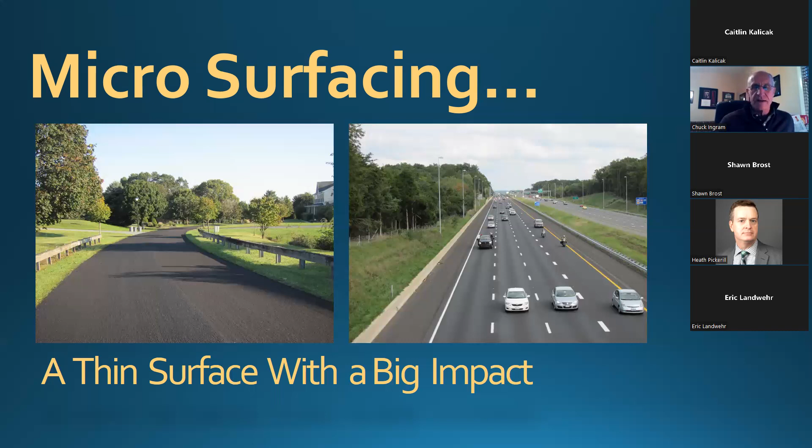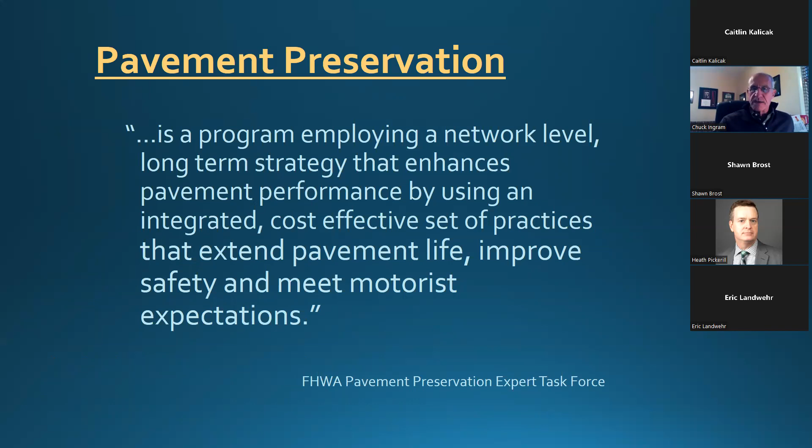So to start off briefly, we can give a broad brush look at what pavement preservation is as defined by the Pavement Preservation Expert Task Force, which just recently changed its name, and I'm a member of that group, so I should know the name, but it's definitely affiliated with FHWA. In years past, they identified pavement preservation as a program employing a network level long-term strategy that enhances pavement performance by using an integrated, cost-effective set of practices that extend the pavement life, improve safety, and meet motorist expectations. So again, it's put on a road that's in pretty good shape to enhance the investment you've already got.

Another FHWA definition would say that preservation involves a paradigm shift away from the thinking that unfortunately a whole lot of people still subscribe to, a worst first theory. They'll say, well, I've got roads that absolutely need to get paved, I don't have enough money to do pavement preservation. Well, nothing could be further from the truth. So what we're trying to do today is gain some insight on how we get away from this worst first way of thinking and move more towards optimum timing, because the timing will have everything to do with the success of these thin treatments.

One of my favorite definitions of pavement preservation: when I first got started here in Virginia back in the mid 70s, the highway maintenance engineer in VDOT, before pavement preservation or preventive maintenance were buzzwords, said this kind of stuff is something you put on a road a year before you need it. And really and truly, all these other definitions had a lot of words to them, but when it comes down to it, if you time this right and put the right treatment on the right road, a year ahead of time is probably a good timeline to stick to.

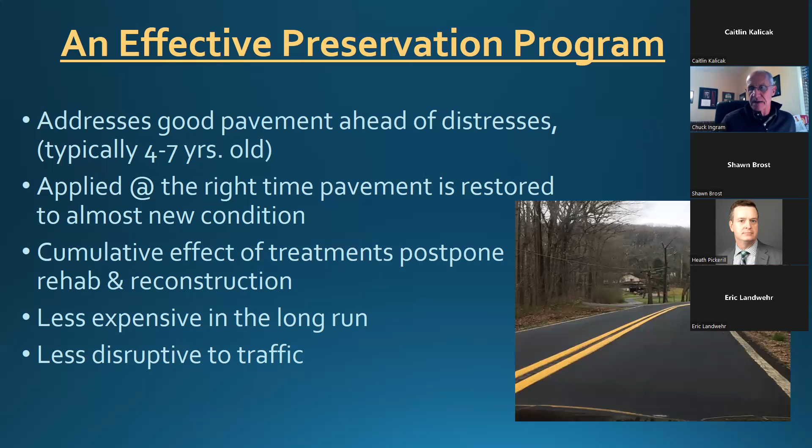This is the second application of microsurfacing to a road that's had nothing else done to it over the course of 17 years. And so he uses this picture to argue with his bean counters that pavement preservation is really paying off for the county.

Pavement preservation is really an umbrella that covers different types of maintenance. What we're going to spend most of the time on is the preventive maintenance aspect of pavement preservation. We're trying to capture these pavements while they're still in decent shape, before the surface distresses have a chance to take over. But we're all involved with budgets and decisions and everything else, so there are going to be times that we're using these thin treatments as corrective tools.

Sometimes the surface distresses are caught up. Maybe you're in year 7 or 8. You've got some surface distresses. And so what you're really doing is shortening the potential performance curve of a thin treatment by using it later in the pavement's life, because you're hoping to correct the surface distresses that may already be in place, and consequently they're just going to shadow through some of these thin treatments a little quicker than they would if you had applied the stuff to a pavement in a little bit better condition.

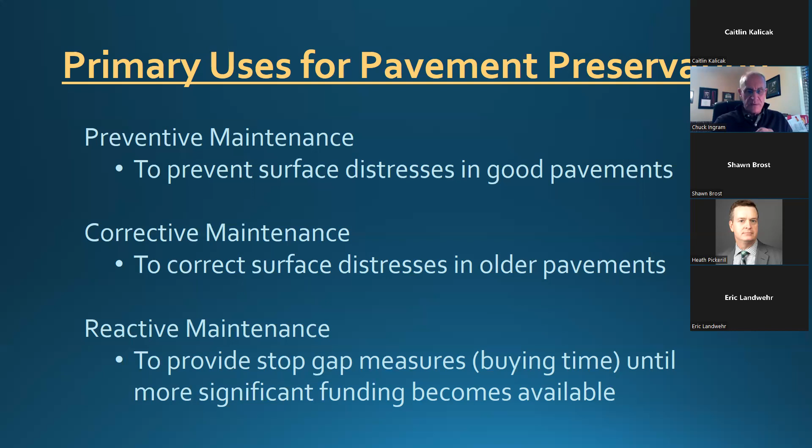And we also get caught in a situation where I just got this much money, I got this road, we got to do something to it. And I understand that putting a blanket on this road right now is not what it really needs, but I need to buy a little bit of time. And I'm really cautious about agencies that are stuck having to react this way to their budgets. But as long as everybody's on page with understanding what the intent is of putting a thin surface treatment like a microsurfacing down on top of a pavement that's several years old with multiple distresses in it, as long as we understand that we're just trying to get over the hump until we can afford to do the proper, perhaps more expensive fixes, we'll be okay.

What we refer to a lot of times the microsurfacing as is one of the top of the curve treatments. Now look at the red line. We've all seen pavement condition curves over time that tell different stories, but obviously your pavement's going to start off in year 1 in excellent condition. And arguably, this chart goes out to where the pavement condition at year 13 or 14 has completely reached the end of its life. Now, obviously, I've gotten some pushback from friends in the hot mix asphalt industry over that slide, arguing that their pavements are going to last longer than that. But then I've also had discussions with various DOT people who are seeing pavement life not reaching this level. So we'll just pick this happy medium.

In the first 75% of this particular pavement's life, or sometime in about year 10, you're going to lose about 40% of the quality that was built into that pavement. As you can see, that curve is just sort of gradually depleting right now. But in the first 10 years, you've lost 40% of your life, but all you do is go forward another 2 or 3 years and you've lost yet another 40%. So once that curve starts dropping off, we really start losing the value of the pavement that we have. Something's got to get done to it closer up to the top of the curve that's going to extend that serviceable life.

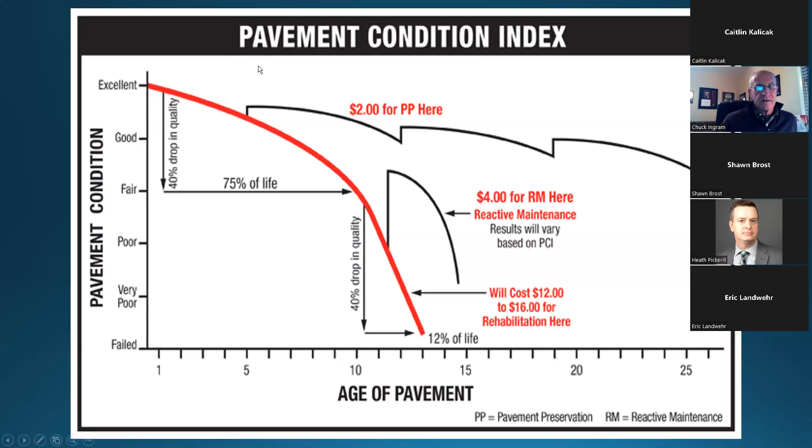Putting it in terms of the thin treatments that we're talking about here, up on the top of the curve, like I said, you've got your fog seals and slurry seals and microsurfacing. Pavements have got to be in pretty good shape for those to be effective. And we're still above the 75% of the life curve here. Arguably, some forms of chip seal applications can be still effective a little bit later down that curve.

But once you start getting much below the fair category, some of these thin preservation treatments really are not going to be the answer for getting your system back up into the condition that you want to keep it in.

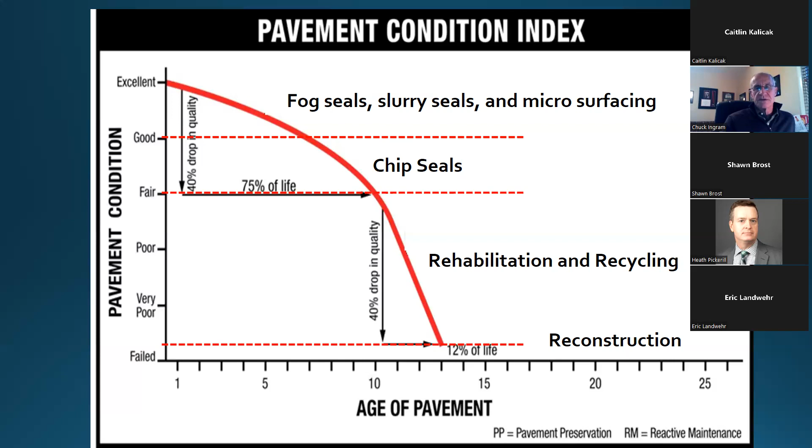This is one of the better pictures and stories that clearly tell just what I've been talking about here. Got this slide from a friend of mine up in Connecticut. There is a road up between Fairfield and, I'm not sure what the neighboring town is. The two towns co-own this road. Fairfield owns to the right of the double yellow line. The other town owns to the left.

In 2004, they did a cost-sharing job where they had someone come in and mill and pave the pavement. And over the course of the years, the town on the left just let Mother Nature take its course, whereas the agency on the right-hand side had already adopted a fairly aggressive pavement preservation program citywide. And in year 6, after the application of the new asphalt, they began a crack sealing and microsurfacing program. So that was in 2010.

And fast forward here, you're 6 years later, and you can graphically see the value of what a periodic combination of pavement preservation techniques can have over the old worst first philosophy that the town on the left has. So we have a pretty graphic example of what the value of pavement preservation can be on similar pavements.

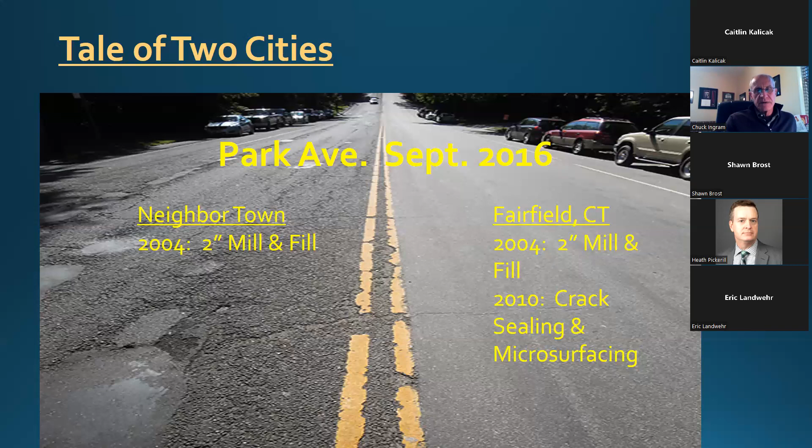Okay, for those not really familiar with what microsurfacing is, and we'll see pictures in just a second, it's a mixture of a finely, continuously graded aggregate, a little bit of mineral filler, some polymer modified asphalt emulsion and water, all properly proportioned and mixed as a thin surface treatment. We'll get into the recipe and see the application equipment and how it works. But basically, it's just a thin, say, 1/4 of an inch or 3/16 of an inch thick application to a road in pretty good shape.

When it's applied, the cured microsurfacing is going to have a homogeneous appearance and fill cracks. Be very careful with that terminology about filling cracks with microsurfacing. That's why I capitalized it there. While it is a liquid material with some fine aggregate in it, it will seep into some of the wider cracks. But the microsurfacing itself is not designed to seal cracks on a long-term basis. It's not your end-all be-all treatment for cracking.

I always say that if you've got a cracking problem, treat it with the cracking materials that you've already utilized, and we'll see how well they work with the microsurfacing in combination in just a little bit. But if you use the material properly, it's going to adhere firmly to the surface and provide a weatherproof high friction seal. So one of the other values that we build into the microsurfacing application is a skid resistant surface, and it's come in very handy on days like today.

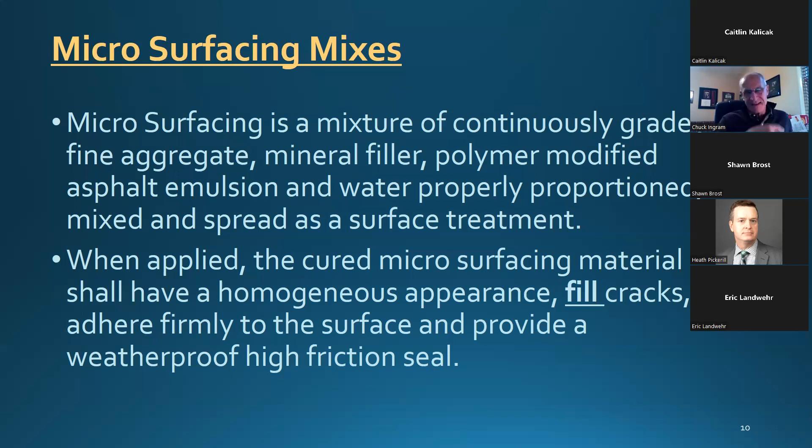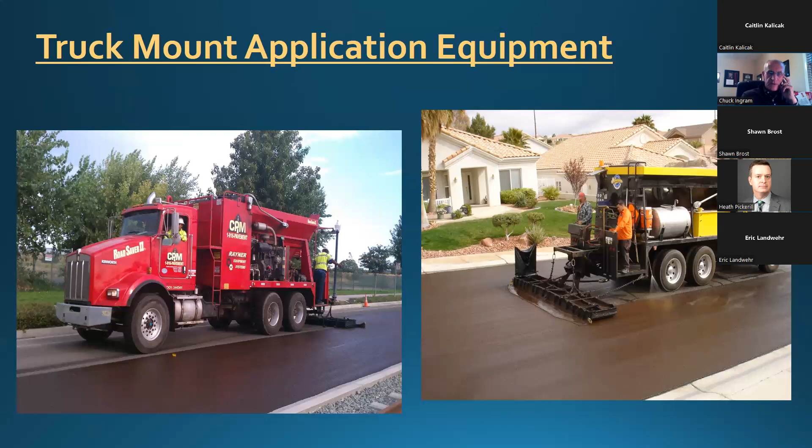Now these truck mount pavers are typically used on some smaller work. You can see here we're working in residential areas, cul-de-sacs, parking lots, places where there's a lot of low volume traffic. These truck mount units are portable in comparison to some of the other equipment that we're going to see in just a minute, and they're very well suited for these smaller jobs. And these truck mount pavers have got some advantages as opposed to some of the bigger equipment we'll see.

It's flexible, it's more mobile. You're operating with several less people on your crew. You know, a truck mounted crew like that, including your traffic control aspect of it, is maybe a crew of 12 to 15 people.

The machine is mounted on a truck chassis. It's quick travel speeds between jobs, and it's very maneuverable. You can sort of see the smaller axle spacings allow you to get into cul-de-sacs and smaller areas.

You know, the disadvantage of these truck mount units, as we'll see with the other equipment in a minute, about every 1,500 feet, one of these trucks is going to run out of materials, and they're going to have to stop, and you're going to have to build a construction joint about every 12 to 1,500 feet. And it's an expensive piece of equipment in that about 3/4 of the time is spent on the road back and forth to the staging area, getting new materials put on it, and very little time actually on the job.

The operator stands on the back, and we'll see all this in a sec. The operator is working the recipe from the back of the truck and does not have control of the forward speed of the paver. And then sometimes that maneuverability can be a bit of a disadvantage in that you are limited to the smaller locations perhaps where it does its best work.

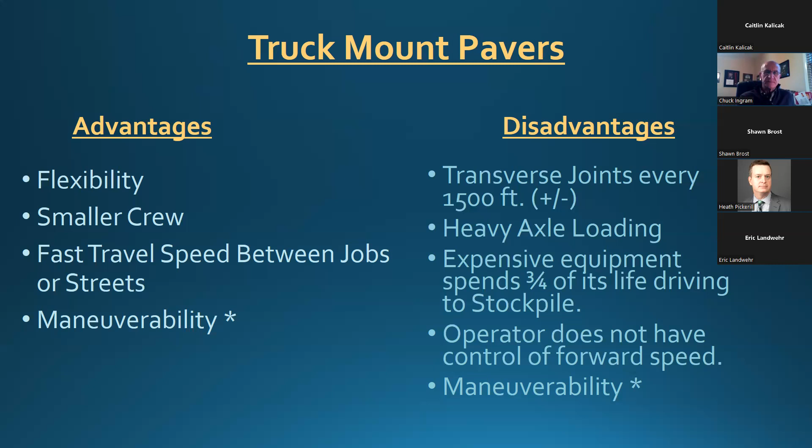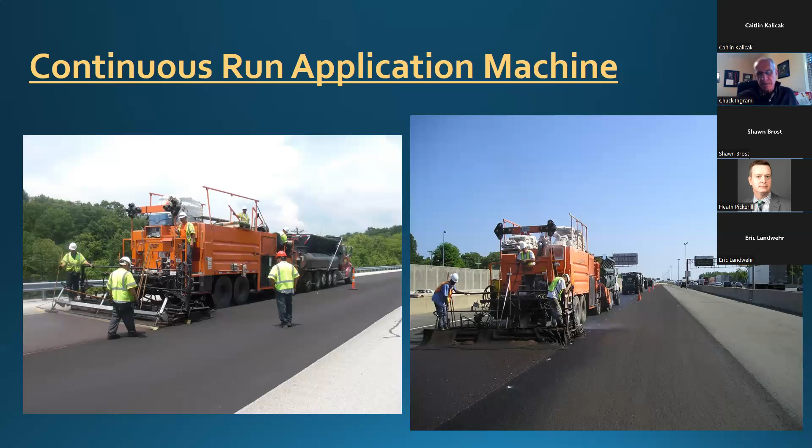It's going to take 15-45 seconds or so for the materials to mix inside the paver before they're dumped into a spreader box that's in contact with the road, and we're paving from right to left here. Right out of the back of that machine, that material, as you saw in the first couple of pictures, is a little bit brown in color because we do have some water that's added to this mix.

As time goes by, in about the first 2 minutes of the time that the material's on the pavement, it's going to start breaking or starting to cure. And when the water starts leaving that mix is when the mixture is going to start turning a darker color. And within about an hour's time, now you've got a brand new installation of a texturized black pavement that should be ready for slow rolling traffic. Now, the microsurfacing that we're talking specifically about is designed to hold that slow rolling traffic in an hour's time.

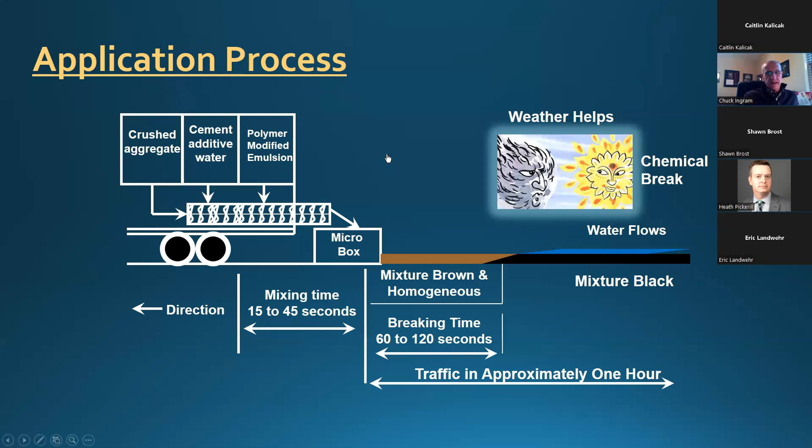And if I can get my cursor straight, we'll turn this video on, and I got a couple of other comments while we're going. Oops. There we go.

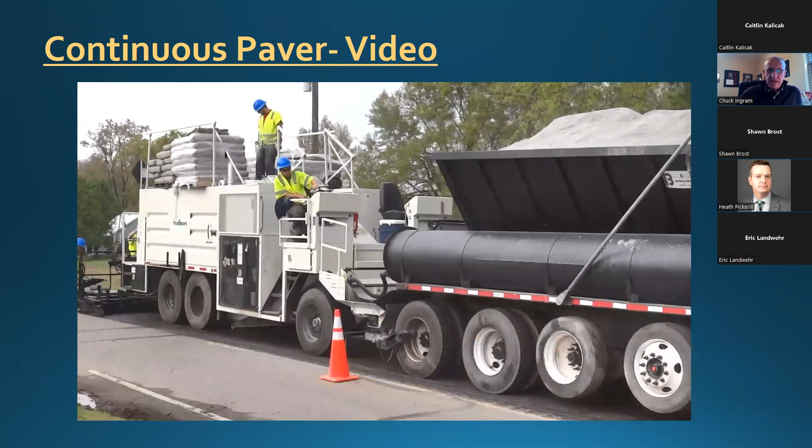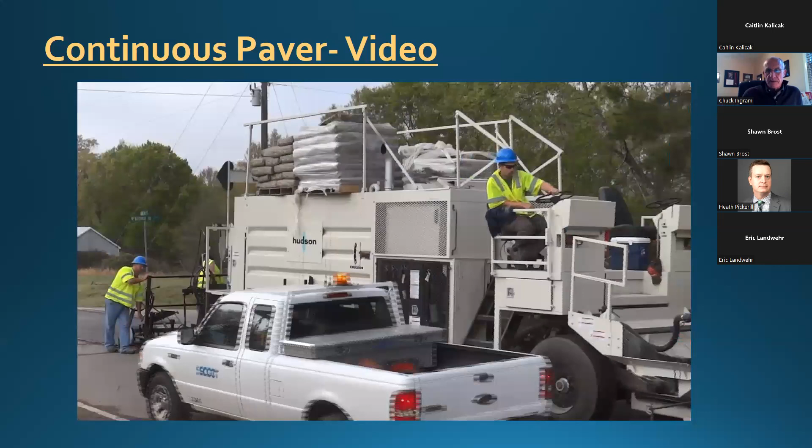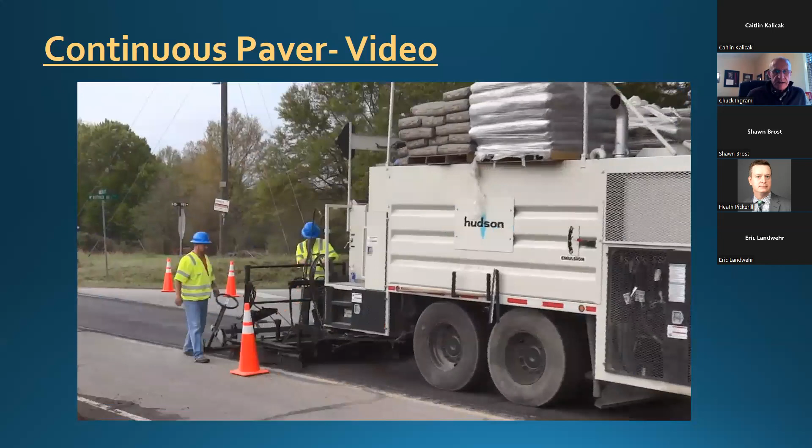You see all these materials are being transferred from the front truck to the back unit there, the paver. The fella sitting down there is making sure he's driving in a straight line. The fellow up top is monitoring the feed of the aggregate as it comes up into a hopper bin. He's checking his gauge settings and the connections with his liquids there. You can see a little picture on top there. We got the stone flying into the hopper. And it's all being moved to a mixing chamber on the back end.

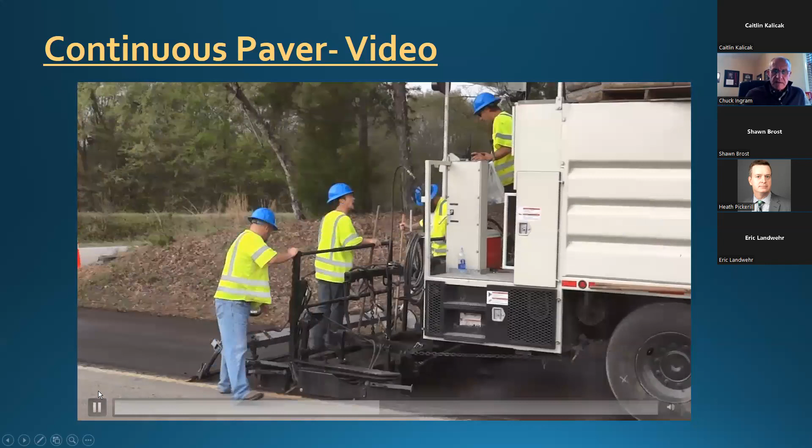I'm going to try to halt this in just a second, where you got an operator back there that is monitoring what's going. Shoot. I apologize.

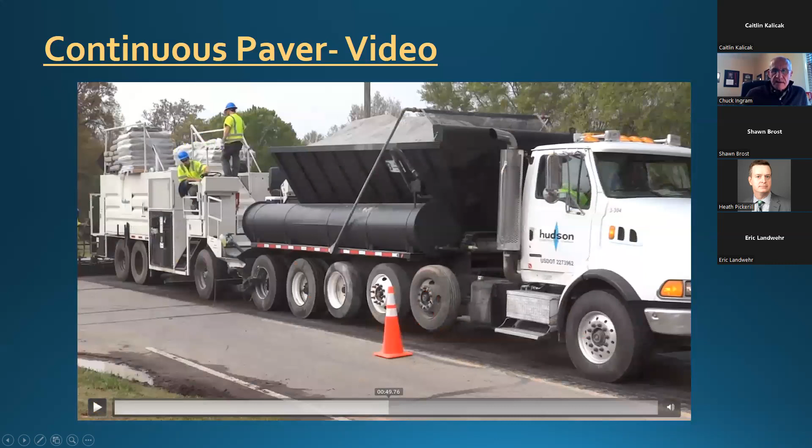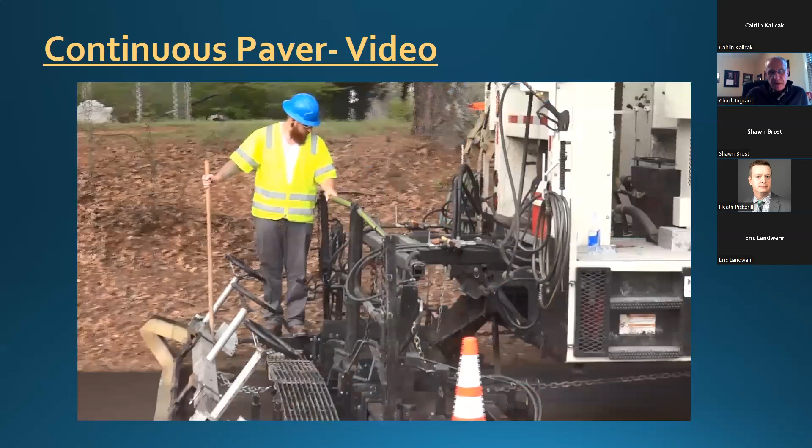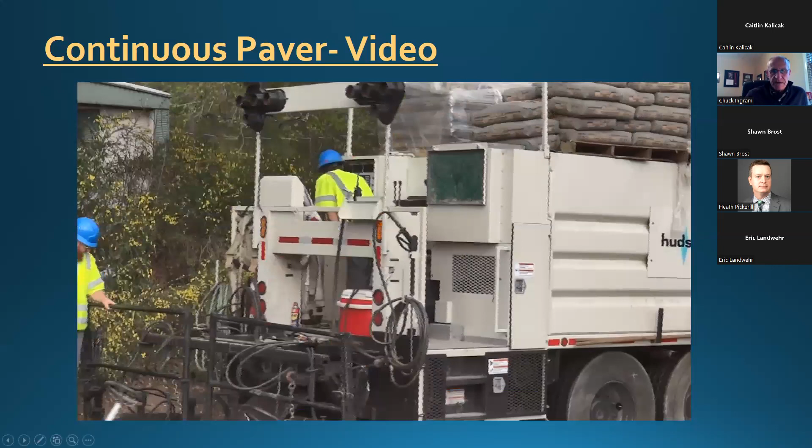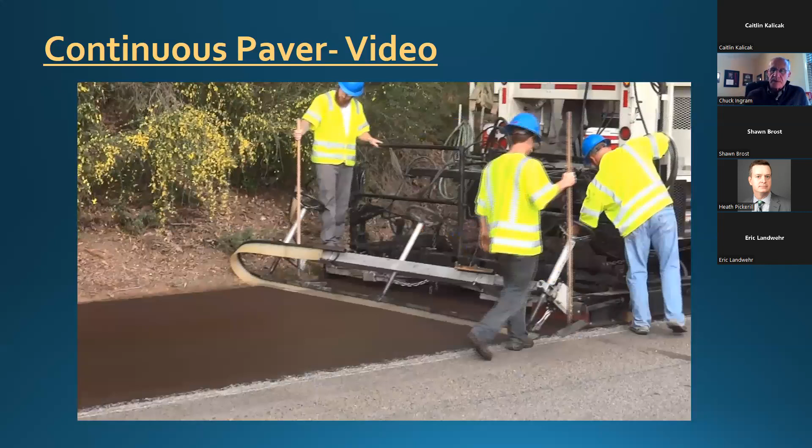Okay, the material's been coming through the machine. All the materials are metered and factored in. They're spit into that spreader box on the back. The operator is checking right now. I'll show you what he's looking at. The computer screen on the back there is monitoring all the throughput, all the materials. You can adjust slightly the crown or the thickness of the application on the back, which is what that one operator is doing there. But you see it's just a thin treatment applied to a road.

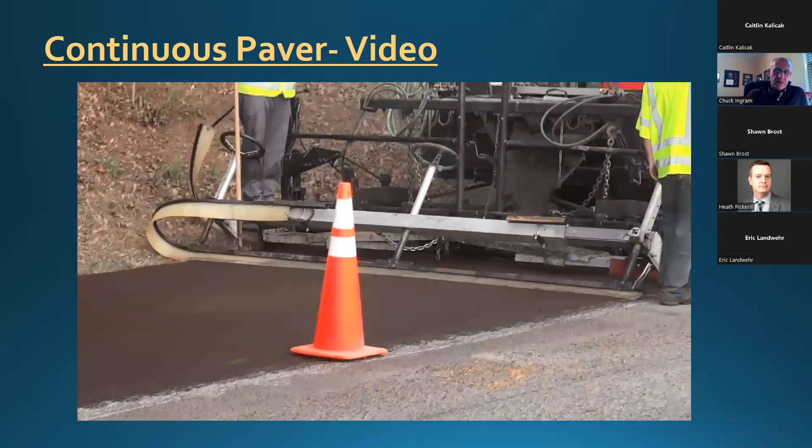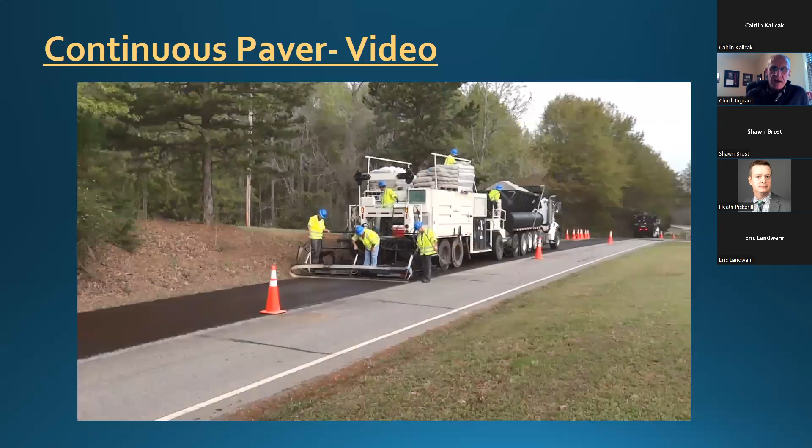It's in pretty good shape with the materials that are metered and calibrated on that machine ahead of time to make sure you're getting the proportion of everything. But a steadily moving operation down through there, a little bit better than a walk pace. Just material as you go. Now you see he's got another nurse truck to hook up to the paver when this load runs out, and it's typically about every, again, 1,500 feet or so.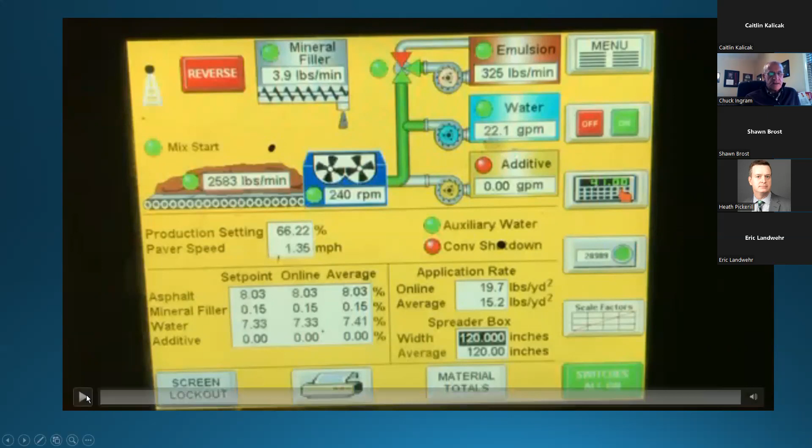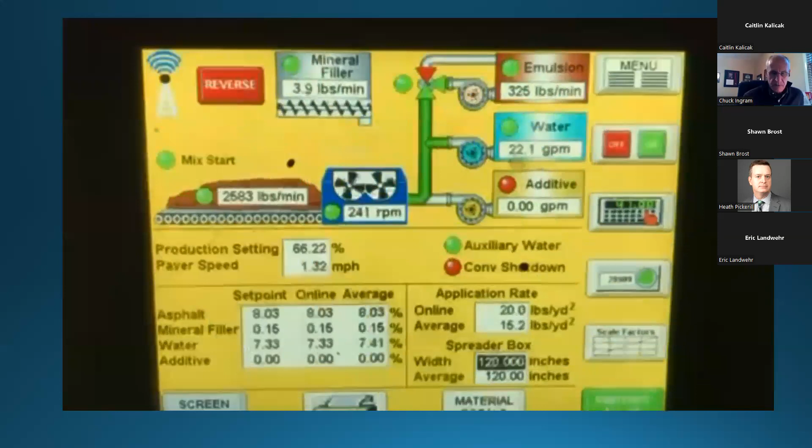The machine is preset. If you go down about 3/4 of the way down on the bottom left there, the set point, the online, and the average is where you have told the machine what your asphalt content should be, what your percentage of mineral filler should be, how much water per weight of aggregate that you're using. And all that is being monitored constantly. And this is what the operators keep an eye on, just to be sure that everything is operating as proper. You can see here also that the application rate is programmed in.

Your specifications are going to dictate just how thick this material should be placed. It's going to be an application rate that's going to have a range; say for this material here, they're working somewhere probably between 15 and 18 or 19 pounds per square yard. And that will be calculated as you're going through. This machine also will have a printer for those of you interested in keeping track on a regular basis through the course of a day of what my project is doing, how much materials am I using. The operator can give you a printout from the back of that machine at any point during the course of a day to keep you apprised on just what's going on.

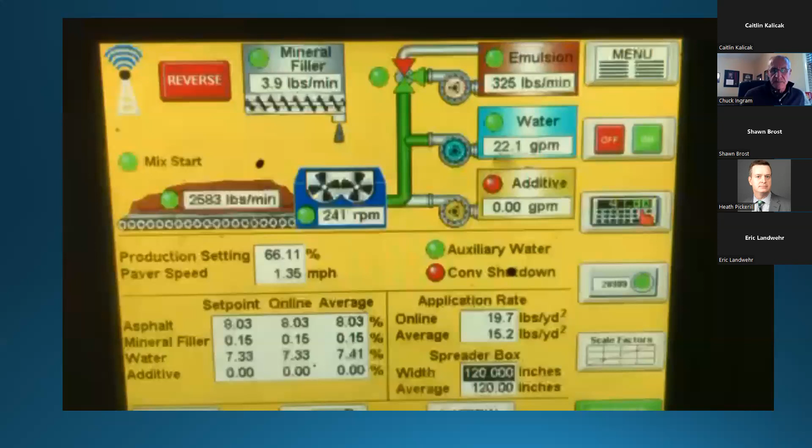It's a great tool for the inspectors, particularly at the end of the day, to keep up with daily production units. So these continuous pavers are widely used. Again, just because they're big doesn't mean you can't do some smaller work with them, but they're just a little bit too cumbersome for doing a lot of cul-de-sac type of work. But obviously an advantage with the nurse trucks and the onboard storage of the paver, you're not going to have as frequent of transverse joints as you do with the truck mounted units.

That operator on the back of the truck has full control of the forward speed. Obviously, you can cover a little more ground in the course of a day. The first guy that we talked about, the line driver, there are steering wheel stations at both sides of the machine, so he can pave with and against traffic if need be. The trucks, you've got the availability of trucks to keep that operation going.

And when we talk about the calibration, which is really critical to make sure that recipe that I keep referring to is consistent, if you've got a job where you've got those small truck mount units on it, you've got that many trucks that have to be calibrated on a regular basis just to be sure that the throughput of all those raw materials is consistent. With a continuous run paver, you just calibrate the thing one time and you're set to go.

Obviously, if your paver goes down, you're done. You don't have any other mixing capabilities. So that's one big disadvantage. If something happens with one of these pavers, you're kind of dead in the water for a while. They're not as maneuverable moving from job to job as some of the truck mount units are. So you need to load it on a low boy and haul it from one place to another.

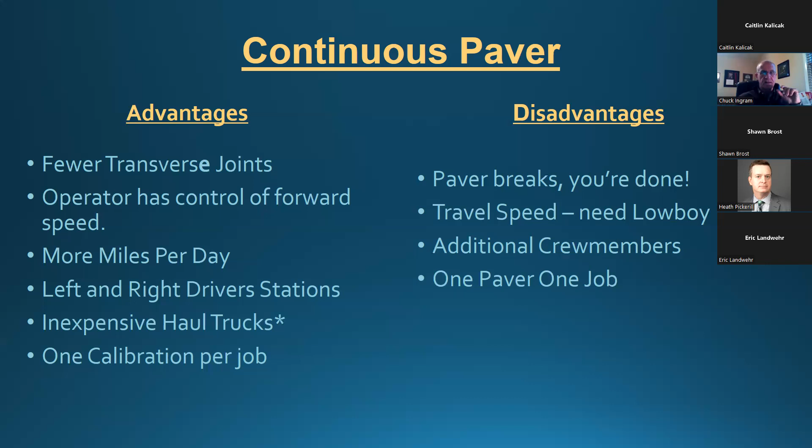We'll talk about the different sizes of aggregate. Okay, now we're still talking about one application of material, but how smooth or how coarse do you really need your pavements? What type of pavement do you have? What type of speed do you have? What's the volume of traffic on a daily basis? Some of these questions we'll get into in just a second will kind of dictate how smooth or how coarse of a pavement that you want to use.

Now, these are the ISSA gradations of type 1, type 2 or type 3 aggregate. And those of you that understand sieve analysis can read here and tell that type 1 aggregate is a very much smaller aggregate. It's a smoother stone. The type 2 is an aggregate size that we're going to use generally for your subdivision work. We can even do some arterial type work with the middle grade aggregate. But for your maximum skid resistant situations out on an interstate pavement, for instance, you may want to lean toward the type 3 aggregate. We'll put this in pictures in just a second.

But again, going back to the type 1, you can see that 100% of that stone is going to pass the first 2 sieves, whereas you've got a smaller amount of material actually getting passed through on the coarser sieves. So it's just a decision that you need to make in-house with what type of application and what type of surface you want afterwards. Now, the one thing that you pay attention to with each one of these aggregates too is the thickness of the application.

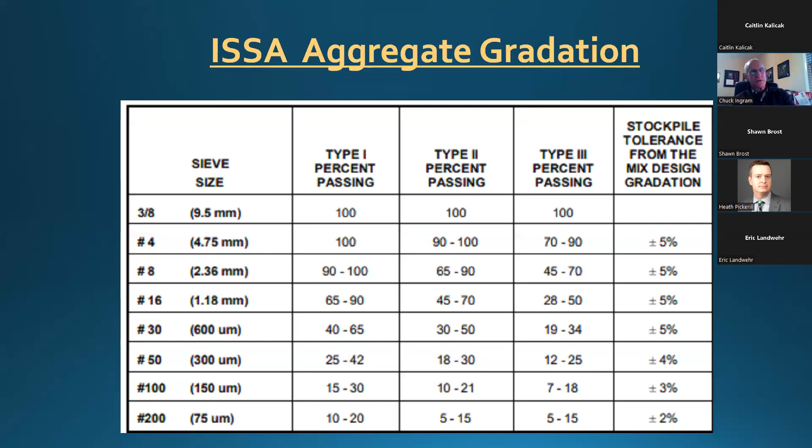And just graphically, this is basically what we're looking at. Here in Virginia, we do a lot of work with each one of these 3 aggregate sizes. The type 1, as you can see, still does have some texture to it. But really, when you put that down, get a little bit of traffic on it, and let it start rolling it out itself, that type 1 aggregate is a very, very smooth surface.

Now we'll use that in residential work almost exclusively. It's the slower speeds and the lower volume of traffic. You don't necessarily need a pavement that's going to offer maximum skid resistance or be that thick. We've got some good life expectancies out of the type 1 aggregates on lower volume roads.

Type 2 is the workhorse. That's sort of the one that we'll go to with your bigger neighborhoods or even your arterial roads sometimes. And we'll see some interesting combinations of these gradations later on before we finish up. Again, it all goes back to your desired life expectancy, your desired surface texture, and your contractor can work with you and kind of custom make you a program based on the availability of his aggregates.

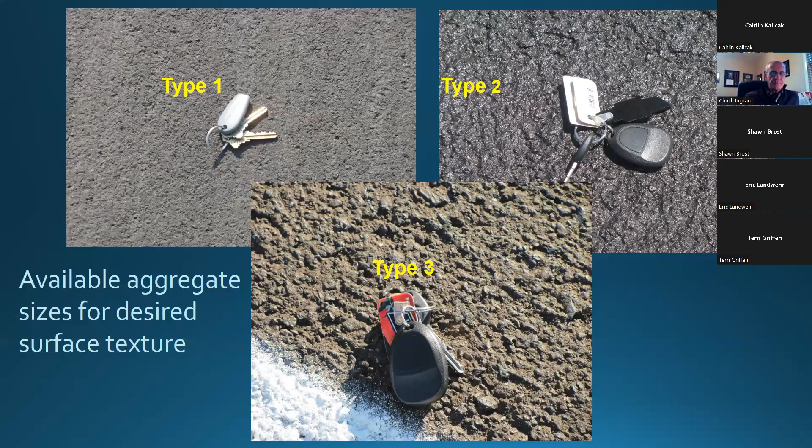Hey, Chuck, we've got a question in the chat real fast. Have you got a second? I didn't open that up.

Do you ever use milling in the micro treatments? Yes, we do. In years past, particularly before people got very comfortable with micro surfacing being used as a skid resistant application, they had contractors actually do some micro milling to ensure that the pavement was no longer slick, but now we're going to put micro surfacing on top of milling. It really didn't make a whole lot of sense then, and depending on the situation, it's not necessary.

The micro milled surfaces certainly create a uniform surface that will accept the micro surfacing and help it adhere to the pavement, no doubt about it. But it's not necessary to do any micro milling or regular milling prior to, unless the pavement is really out of shape, out of contour. But again, what type of condition is the pavement? What's causing the deformities on the surface? If you've got to do some milling to reestablish a grade and slope, is it possible to use? Yeah, sure. But honestly, I think depending on the situation, it would be a little bit overkill. Not 100% necessary. Does that kind of answer it?

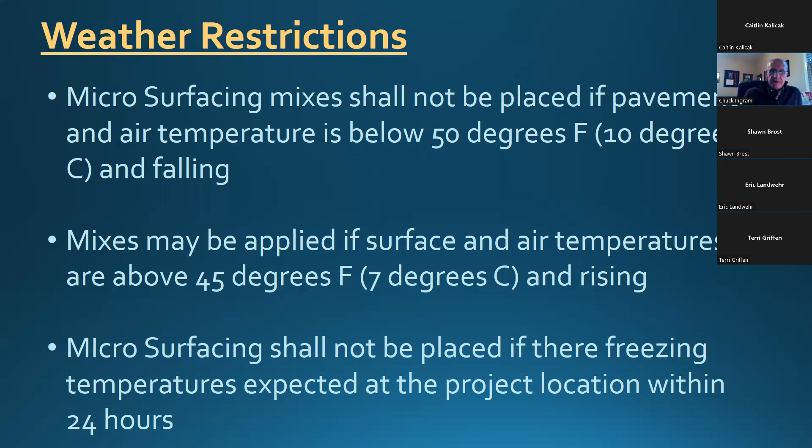Some benefits of micro: we don't want to dwell much on the cost, although it does cost a fourth to a third of the cost of your regular hot mix asphalt pavement. But we still don't want to say that we can replace asphalt pavement. That's not the intent at all. We're going to preach right treatment on the right road at the right time.

It's a cheaper application. But are you getting your money's worth out of it by putting it on roads that are deteriorated past the point of really paying you back? So just don't dwell too much on the cost, but it is an important factor, particularly for those that are just getting into the preservation business, to understand the value of a budget and understand that worst first isn't the way they really want to address their system. The money can go a long way if it's on the right pavement.

Okay. And kind of answering our own question from a minute ago, milling's not required. It's a thin treatment; typically people will mill sometimes at the gutter pan to match elevations with thin lift asphalt pavements. This material again is 3/16 to a quarter of an inch thick. It can be feathered down to nothing basically at the edge of the gutter pan, so it's not going to affect your drainage.

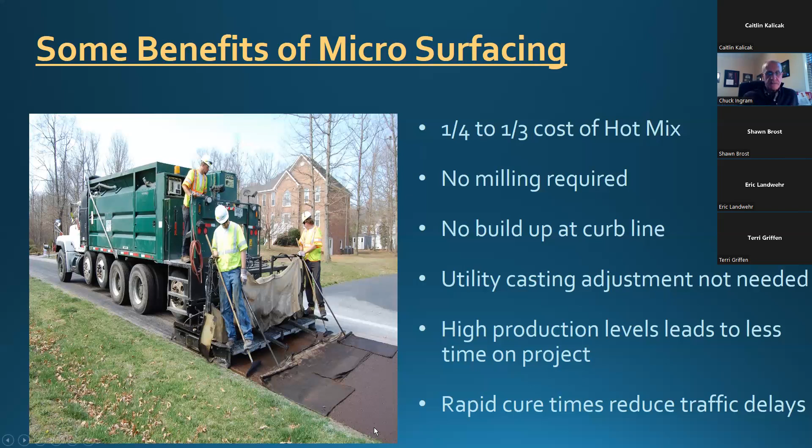With a properly maintained mix design, you're going to have an attractive finish. Depending on the texture on the roadway, we're hopefully going to have a hot mix asphalt appearance when we're done, but yet we can offer a high friction surface that's going to retain skid numbers for the life of the surface. I don't know how many of you are familiar with skid numbers and what skid number will require some attention.

But we just had some microsurfacing not far from here that was 8 years old, they were doing some forensic work on it, and we got some inside information from the guy that did the testing: we were still getting skid numbers in the low 50s with an 8.5-year-old microsurfacing application. With the coarser aggregates, I've seen numbers as high as 62 and 63 with type 3 microsurfacing on higher speed arterials like this one in the picture.

We get calls a lot: I need to get some skid numbers up, how are we going to address that? Well, the high friction surface treatments out there are good products. They're offering a skid number even a little bit higher than that. But when we start talking about budgets, some of that material is going for upwards of 20, 25 or more dollars per square yard in our region, whereas a $3.50 per square yard cost for microsurfacing, offering a skid number in the low 60s, is a pretty strong argument, depending on the pavement you're dealing with. So it's a very beneficial treatment if you only want to talk about skid resistance.

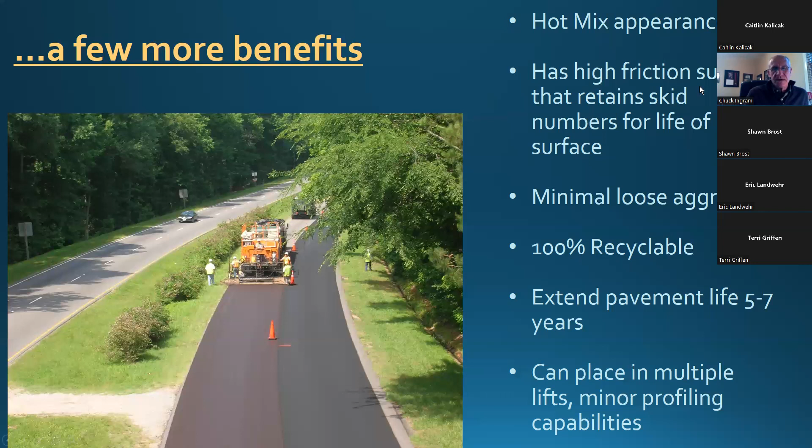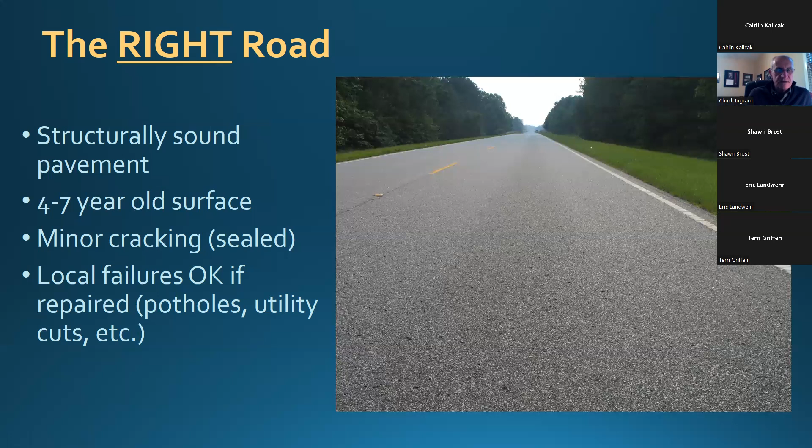Okay, what is the right road? Again, we talked about it. Structurally sound pavement is very important. It's got to be structurally sound. We've got a little thin treatment that we're putting on that road. We're not going to build any strength into it. So we've got a pavement that's in good shape, 4 to 7 years old. You might have some minor cracking in it. Seal those cracks. Local failures, if you've got any, repair your potholes or utility cuts, and just restore that pavement back to near structurally sound condition, and you're ready to go.

Some ideas that you would use to consider whether it is a candidate for one of these thin treatments, help you decide on what material to use, what gradation of stone to use. Are you dealing with an interstate, a primary, or a secondary road? What's the speed? What's the volume of traffic? Are there other distresses, including cracking in the surface?

What's causing the rutting? Is it an environmental rut? Is it a structural problem causing the rutting? Is it what we'll call a consolidation rut? We'll see pictures of this stuff in just a second. Utility cuts. Is the pavement slick or flushed?

Do you have vegetation in the road, along the road? Do you have grass growing through the crack interface between your curb and gutter and the pavement? What type of pavement markings do you have on there? And what kind of drainage issues do you have?

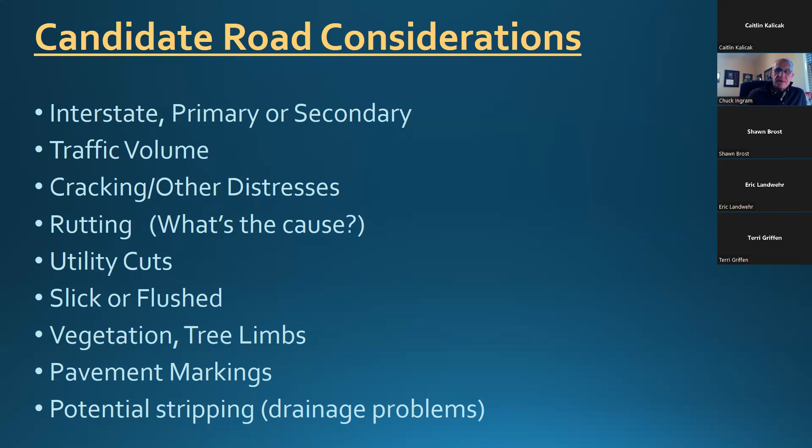You know, there's some problems that are brought about by poor drainage. Determine what kind of road you got here. Am I obviously dealing with something that's going to swallow a pickup truck in it? We have the bottom left is a neighborhood street that they couldn't determine whether or not they wanted to patch it. So the highway department guy actually did that, took a picture of it and sent it to his boss and says, this is where we're supposed to be patching today.

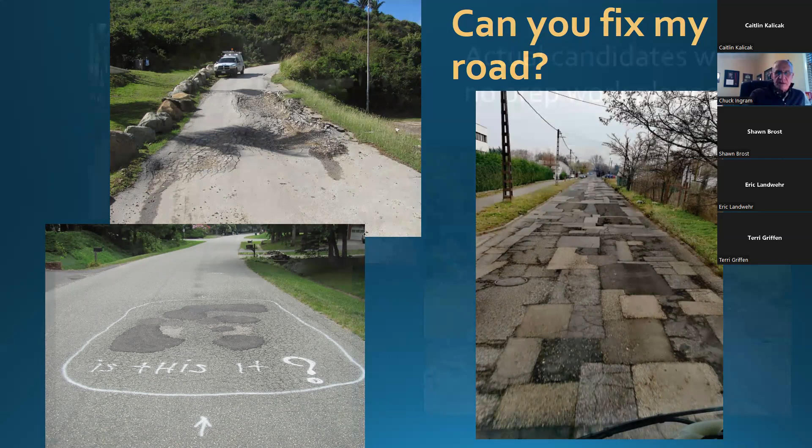But localized failures like that are easily repaired. You can see the rest of the pavement is in pretty good shape. So that was a pretty good candidate with just some local failures on it. And these were some actual candidates with no prep work in the plan that were on slurry seal and a couple of microsurfacing projects that I was involved in.

These are some agencies that unbelievably had used microsurfacing in the past and had tried to slip these jobs, these pavement locations, in on the contract. And there was no prep work plan. Let's just put this micro out here and just see how it's going to do. Well, thankfully we were able to get these types of sections deleted. There's just more than isolated problems here to deal with. They got many more distresses than this stuff can deal with.

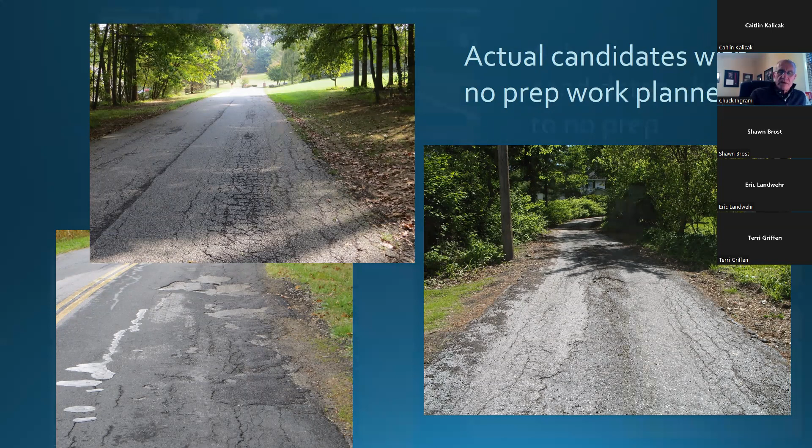Whereas then you got some other people that really kind of get it. You got the top left picture there. They had done a little bit of patching ahead of time, but the road was in pretty good shape to start with, where the start point was just a continuation of a slurry job that was completed a year in advance. And so that pavement had been maintained regularly, and they were able to identify it as a pretty good candidate. Neighborhood street in the bottom left had a little soft spot in it. They cut that out and patched it. And now you've got a pavement that's wholly in good condition.

On the right-hand side was a section of road. You might have some hairline cracking that's not structural in nature. And this particular job was actually just patched out with what they'll call a skin patch, with a tar and chip type of a patch that's just meant to mask the surface fine hairline cracking, and structurally sound otherwise, but they were just ready to go.

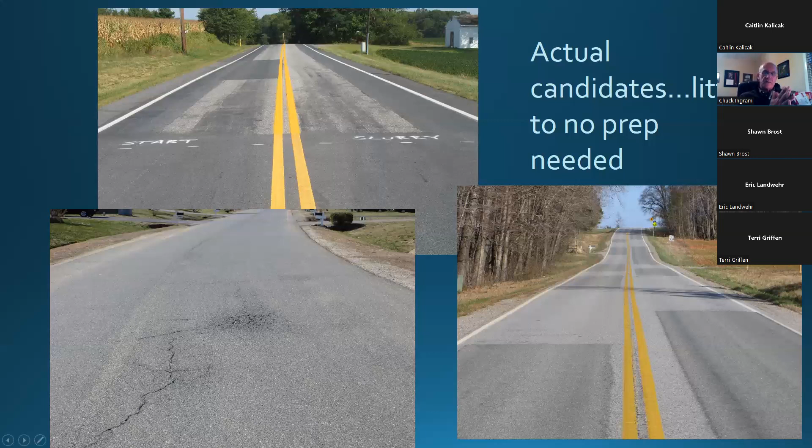So, the point of putting eyes on pavements: I had one fellow that was told that he could only develop his entire paving program, $20 million worth of work, by sitting at a computer screen and spitting out pavement conditions and putting those roads on his paving list. He was told that he didn't have time to evaluate pavements in the field, and it was just the most absurd waste of money that I'd ever been associated with, in my opinion.

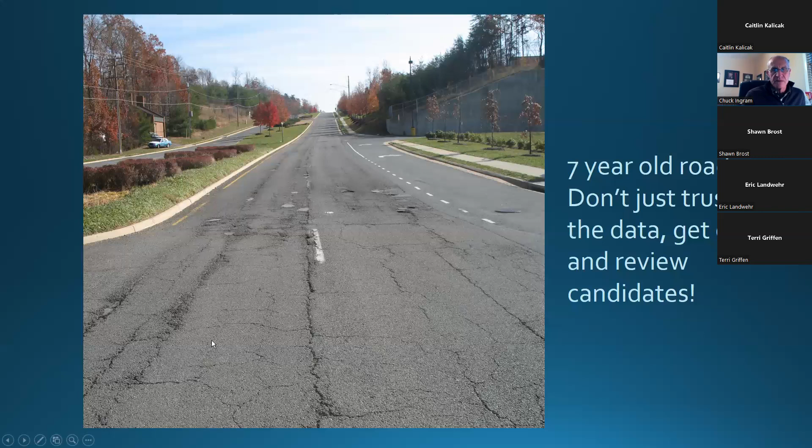But just the importance of putting eyes on it and seeing what you're dealing with. Now, this was a job that was done. You can tell it's kind of marshy land. It's on the eastern shore of Maryland, actually, not far, about 4 or 5 hours from here. But their water table is real close to the surface.

Truth be known, half of the people in the office weren't big microsurfacing fans. I was told after the fact that they were looking for sections of road that were not good candidates on purpose to try to prove a point that microsurfacing was not a valuable tool for them.

So not only did they just pick this road and put this one patch down, where I was standing taking this picture was on the joint of brand new asphalt pavement that they were putting down. So they had milled out and paved a section, and then we're just going to put microsurfacing on this end of the road to do sort of an acid test and say, this is what I told you.

I was shared some information by people who probably shouldn't have, but you look at that and you say, boy, what a waste of time, what a waste of money. No chance for microsurfacing to survive that with no crack repair, no extensive patching.

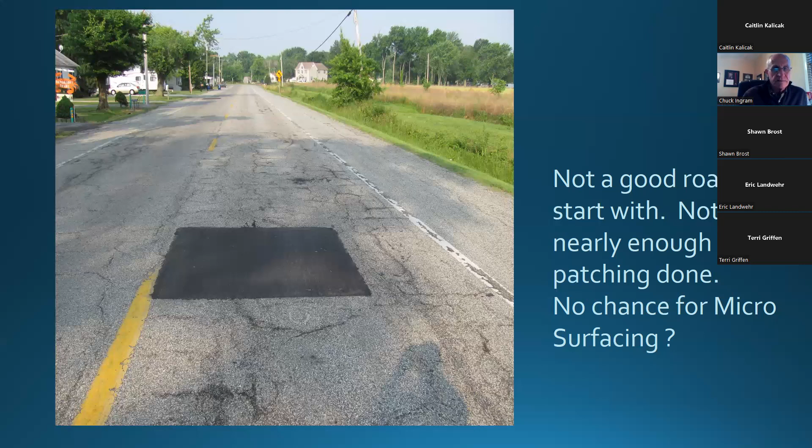Well, I went back 6 months later after the winter and took a look at the microsurfacing job. It's the same location. If you see on the left-hand side, there's a little crab in front of that seafood shack. And so here's that same piece of road 6 months later. And it started making believers out of the fellows over there. And we've gained a good bit of work out of that part of the world as a result of some of the jobs that were designed and now are outperforming what they thought.

Rut filling with microsurfacing is something that's unique to microsurfacing versus a slurry seal or a chip seal, say. But yes, it can level ruts, but determine what's causing that rut. If you've got cracks in the wheel path, it's probably an indication of a base or possibly a subsurface problem going on. Again, we're not building anything that's going to strengthen the road.

On the right-hand side there was a job that was done in North Carolina on the interstate where they had done a 2-inch mill and fill, and immediately the pavement started rutting. Going back and looking, they found that they never got the densities that they were looking for. It was a pavement surface that was, I think, upwards of 30% RAP material. So they never got the density or the strength that they were looking for.

And if you look close at that picture, the rutted section is the top overlay. There is an interface between that and an intermediate asphalt lift, and that interface is not deformed. So they determined that their distresses were only in the surface, that the pavement itself was structurally strong. So they designed a microsurfacing rut filling and microsurfacing overlay project to be done on that piece of road. I think we got a picture of that in a minute.

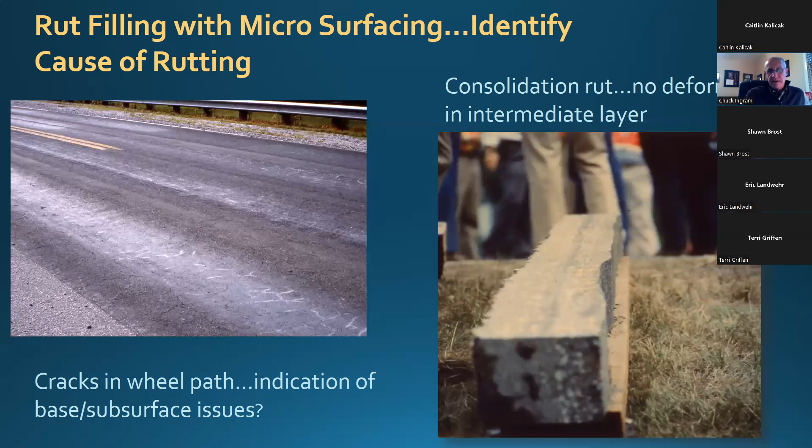But it was determined it was a consolidation type or a non-structurally related rut that the microsurfacing should be able to take care of. And this was on that section of road there, where we had some pavement ruts that had actually rutted almost through that 2-inch lift that they put down. So we were doing some 1 to 1.5 inch rut filling with the microsurfacing.

And you can see we have a different type of spreader box here that's designed specifically for rut filling. We're depositing the rut material in the deeper part of the rut and feathering it out on the edge. So we're just trying to re-level that road once we've determined that it's structurally sound pavement. And then they're just checking for level behind the machine.

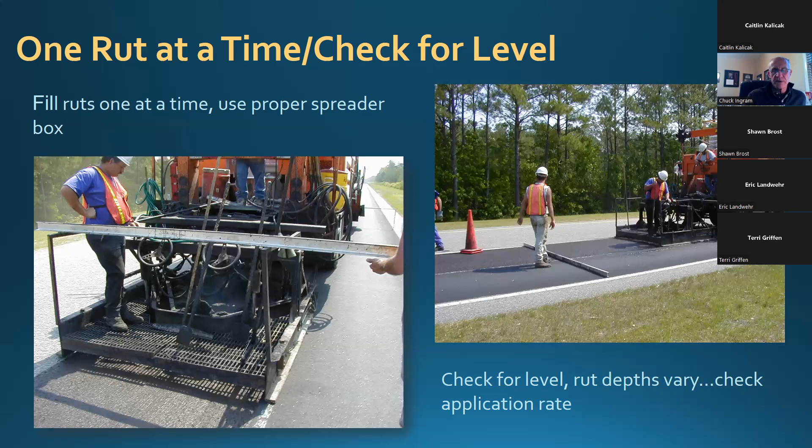You want to be sure that you're at least flush and you can actually overcrown that rut just a little bit to allow for traffic to compact it and level it. And then we come back and put another layer of microsurfacing over the full width of the pavement, extending the serviceable life of that thing by, I think that pavement there was in place for 10 years.

Again, being careful with rutted sections of road. Slurry seal is not designed to do the leveling that the microsurfacing can. And with the microsurfacing, we have the chemistry in there that makes it dry that much quicker. The material will dry before the aggregate has a chance to settle out to the bottom of the rut. It sets up in a firmer fashion that the traffic won't beat the aggregate to the bottom of the rut like it will on some other mixes.

There was a job here on the left that was designed to be a slurry seal application. And throughout the pavement section, there were ruts in excess of 1/2 inch deep. And when I argued the fact that they were putting the wrong material on the road, they said, well, we're too far along in the design phase. We're just going to put the slurry down and let's see what happens. Well, the picture on the left is what happened.

They put a slurry down on a road that had 1/2 inch deep ruts throughout. The pavement flushed. They had skid numbers in the low teens, which is far below the threshold of safety. And so we ended up bargaining with them and doing a cost sharing thing. And on that same road on the right-hand side, we put 1 layer of microsurfacing down, and you can see the surface texture was dramatically improved.

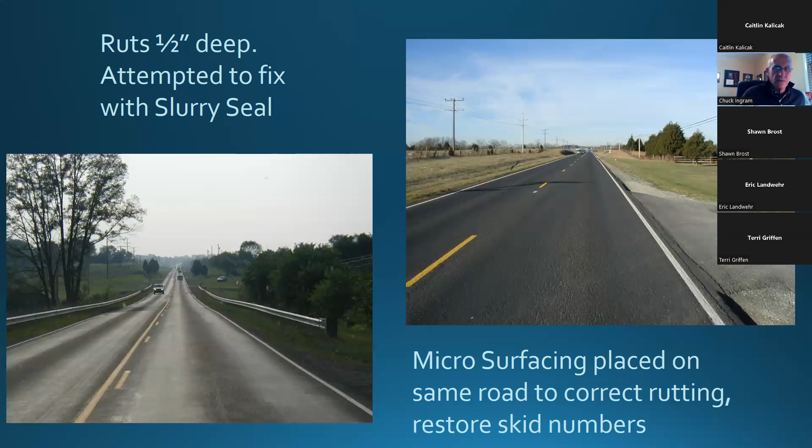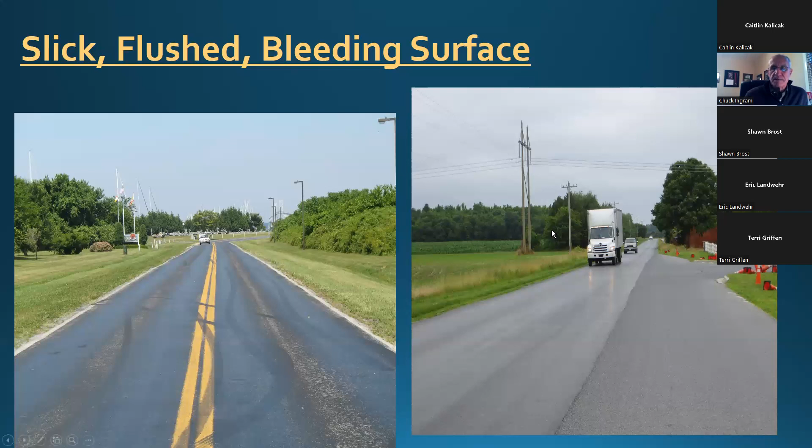The coarser the aggregate that we have, for instance, the type 3 aggregate that was used here, does not require quite as much liquid asphalt to be placed into the recipe, if you will. You've got a lot less surface area of rock the bigger you go, so you don't need to coat it all that much. Couple that with the fact that you already had a substantial amount of asphalt in the pavement underneath of it, or it wouldn't have flushed anyway.

So we could design a mix design here that utilizes a little bit less raw asphalt going into the microsurfacing. We can use this surface as perhaps a sponge to absorb some of the excess oils that were on the pavement to start with. And you can get away with it on a lot of projects similar to that. But it's in your best interest, number one, if you can do these repairs in the spring or the fall, you'll run less risk of mirroring through and shadowing through some excess asphalt from the previous surface.

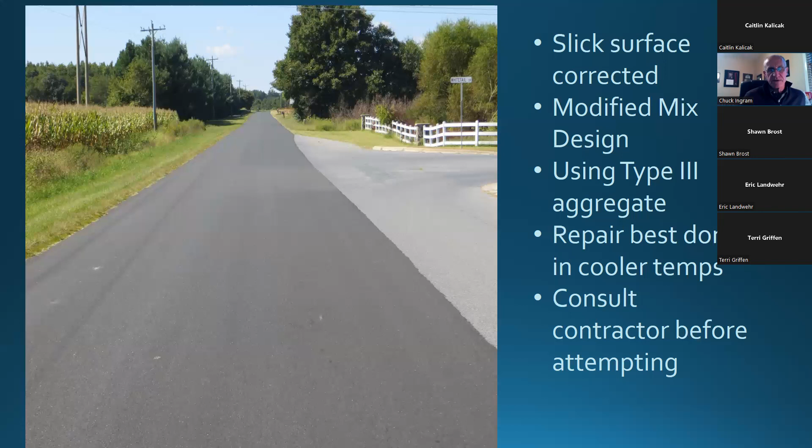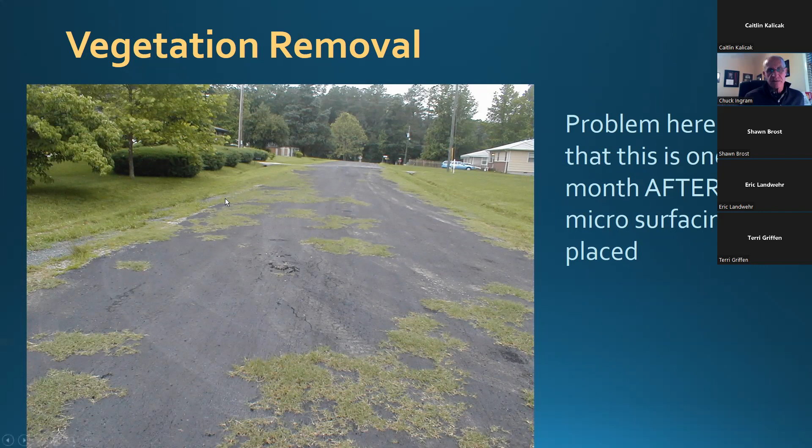Beyond the fact that there was vegetation crawling across the entire surface, you had failures, you had soft pavement here in the middle of the road that never got addressed either. So the stuff isn't miracle material. Just be very reasonable where it's used, and I think you'll gain some real serious good benefit out of it.

We learned lessons as time went on that some of these pavement markings are not very friendly to these thin treatments like slurry seal, or in particular microsurfacing, to bond to. There's another road in Maryland, for instance, where, and I'm not sure if you guys do, they retrace their roads every year. And they retrace it with latex paint with a lot of glass reflective media in it.

So think about it. You're going to apply the paint to a road and restripe it every year. And we're looking at a pavement that might be 6, 7, 8 years old before your microsurfacing contractor's called in there. You might have 6 or 7 layers of paint that are very slick. And with that glass media in there, it takes on the characteristics of a tape marking or a thermoplastic marking. There's just not enough surface tension there for the microsurfacing to bond to it.

So it was realized after learning lessons like this, and this is an older picture I've kept for a reason, because it was years ago before we realized, hey, why don't we just eradicate this stuff, grind the paint markings off, get back to a bare pavement. You can restripe the pattern differently if you want to, or you can retrace and duplicate what you had out there, which is what they did here. But unfortunately, the microsurfacing didn't stick to the original paint.

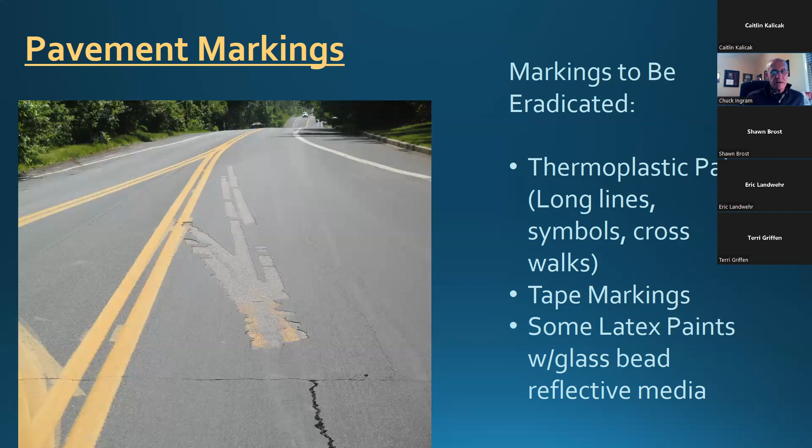Drainage and subsurface water issues. There's not much out there that's going to stick to pavement that's got standing water on it. This job here on the left, the guy tried to get us to repair the road 2 or 3 years after the microsurfacing was placed, and we just said, unless you correct the problem, we're not going to be able to ensure any level of success for you.

We do other work for that agency in other parts of his county. We talked about a year later, and he said, hey, we went back in and patched that place, so you don't need to go back and fix it. I wasn't intending to anyway, but I asked him, did you fix the puddle? Did you get the drainage under control before you patched it? And he goes, no, we just cut it out and put some more asphalt in it. Well, he's setting himself up for the same situation.

Water is the culprit that's going to be the baseline to many defects out there. So please try to get water away from surfaces as best you can, particularly when dealing with thin surface treatments. What we do run into in certain situations, again, those swampy, marshy areas, is water that's just trapped under the pavement. You might have stripping going on due to poor roadside drainage or subsurface moisture. Those pavements may look really good on top, but something could be going on underneath that just hasn't manifested itself yet.

So what unfortunately can happen, those of you that have been out on a microsurfacing job and had the occurrence of some local delaminations, you can reach down there and just pick up a slab of that microsurfacing.

And if what you pull up looks like that on the bottom, you're pulling some of the asphalt road with it. Your microsurfacing is stuck to the road. Your road is just actively stripping over years. And what the microsurfacing has done, unfortunately, is accelerated what was already going on. And being that it was the last thing placed on the pavement, it just speaks to the sealing capabilities of the material. It wasn't allowing that material to take on its evaporative drying and let that moisture work its way and wick its way out of the surface. You've sealed it in there.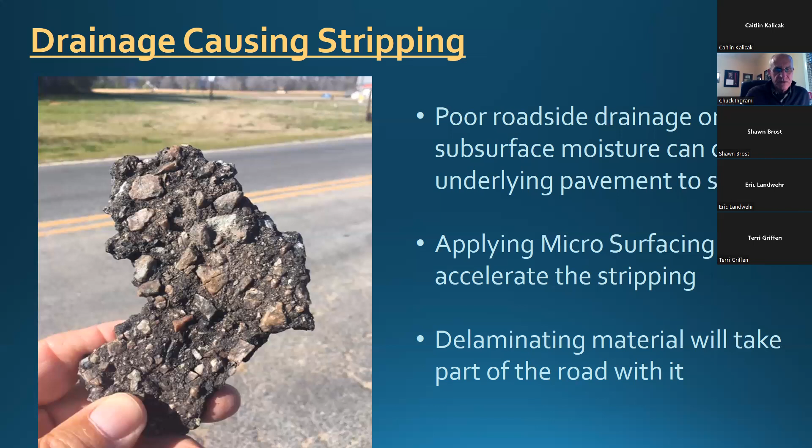So if you get a sheeting event with some microsurfacing, take a look at the bottom side of that little slab that you pick up. And if it's looking like this, definitely don't fault your contractor too bad.

We're just going to try to wrap up as quickly as I can, or we're going to be getting close on time. But there's possibilities, depending on the surface distresses that you've got, combining some of these preservation or preparatory treatments with microsurfacing. You can really custom make a fix for any particular instance that you're dealing with. Combining some of these thin treatments is going to enhance the performance, increase the safety, increase the serviceable life extension, increase the durability of a road.

And what you might need is a section of road that's got distresses in it that maybe not one particular treatment will fix, not one coat of microsurfacing, not one treatment with crack sealing, not one application of chip seals. You might need to double up with some of these treatments to really get the full effect of saving a pavement. And you can still do it for far less money than your typical mill and fill.

And just depending on the treatment or your distress, again, consult with your contractor. Come up with a custom treatment that's going to address your problems. And typically the thin treatment contractors can work with you, particularly the 4 contractors that Shawn mentioned earlier. Reputable folks, got a good handle on pavement conditions. I would trust their evaluations.

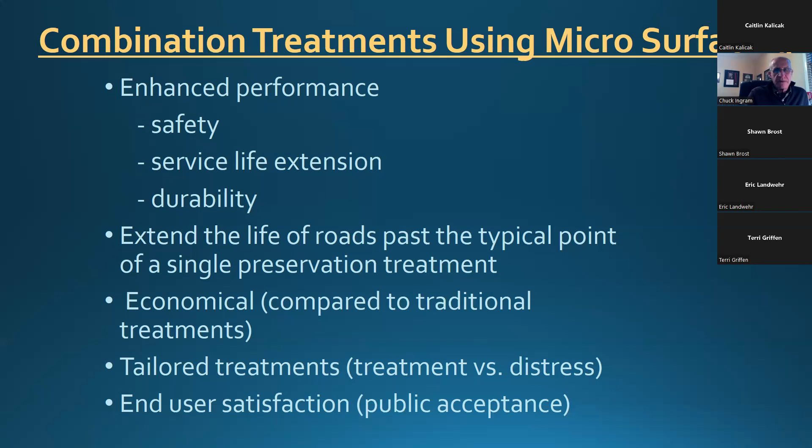So it might be a pavement that's a little older, a little bit more distressed, but just don't throw the baby out with the bathwater. You've got a pavement that's aging a little bit, and all it's got is some surface cracking. Waterproof it with a crack sealing, and then come in with your slurry or your micro. If you've got a really oxidized and really cracked up pavement, you've got a whole lot of crack sealing going on in that other picture that can be problematic for something else that you want to put on top of it.

We talk about bonding problems. Perhaps a microsurfacing would have a problem bonding with some of these crack sealing jobs that are just chasing cracks that are one foot square everywhere. So have reasonable expectations. Again, consult your contractors and come up with the right solutions.

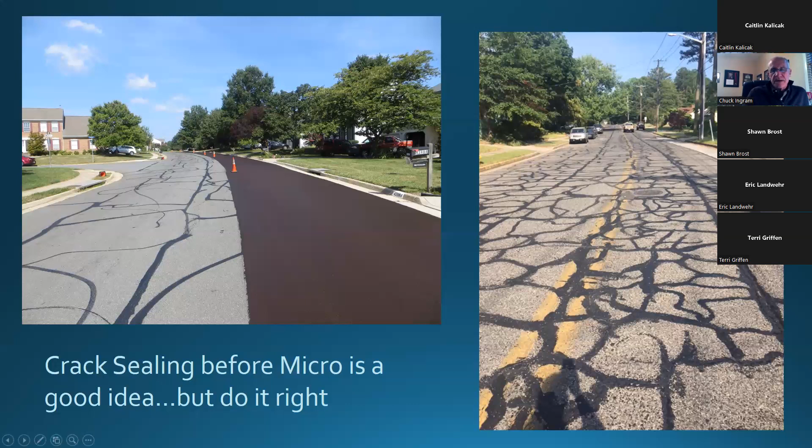We talked about being able to put microsurfacing down in more than one lift. This particular agency here had a pavement in good shape, high volume arterial. They wanted a little thicker application. So they wanted to use the type 3 material on the first layer to correct any of the surface defects. The minor leveling was taken care of with the first coat of a coarser aggregate.

But given that it was in an urban setting with high density, they wanted it to not ride quite so loud or rumble quite as loud as some of those type 3 aggregates will. And they wanted to put a smoother second coat down. So that was accomplished there, and it just fit the bill all the way across the board for them.

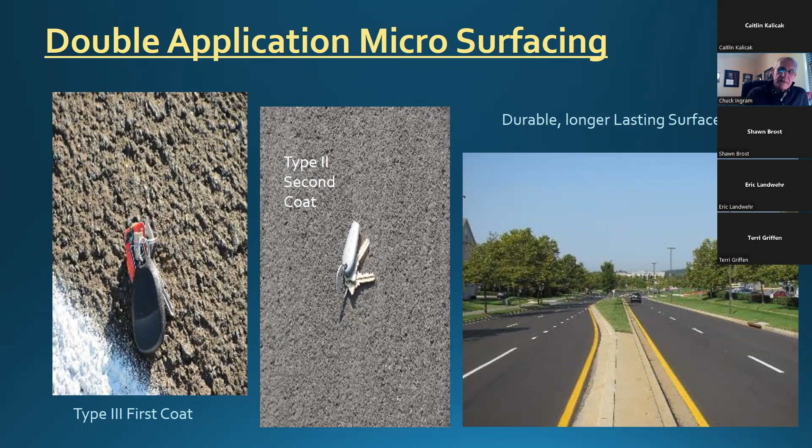Cape seals, we've not talked about cape seals, but another combination treatment where you might have some surface cracking. You might have some surface defects that are beyond maybe even crack sealing and micro.

Use your chip seal application as a mass crack filler. Use your chip seal application as a mat coat to create a template for your slurry or your microsurfacing to be adhered to. It's a good treatment, and again, certainly budget friendly as compared to some of your other options. And I get the argument all the time: well, I can't put tar and chip in a neighborhood with nice homes in it.

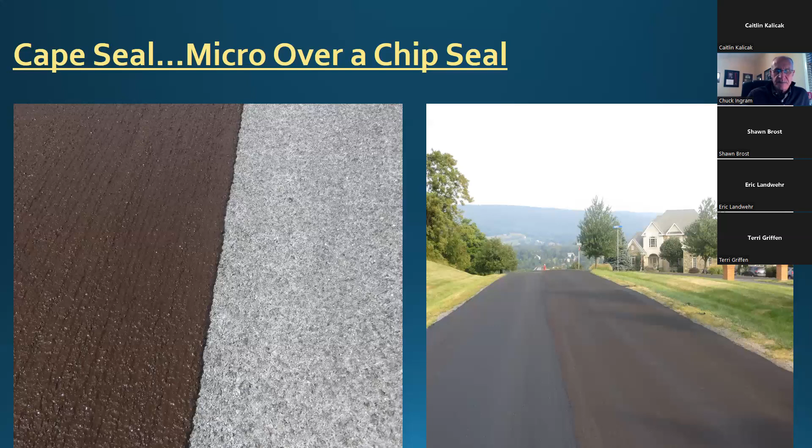Well, this golfing community up here near Washington, D.C., they were adamantly hopeful that we would come in and do a treatment like this. So it was accepted very well. In fact, I had a lot of help from the neighborhood guys that were retired with traffic control. It was funny to watch some of these older guys knocking on doors and making sure people got their cars out of the street. So, point is that surface distresses don't necessarily mean that you've got to go the depth of milling and resurfacing everything.

Some unique combinations. Picture on the left was actually a microsurfacing rut fill job that was done ahead of an asphalt overlay. It was in another swampy area in coastal Carolina that they knew they had pavement moving underneath, and they just wanted to level what was there as best they could. The hot mix asphalt guys couldn't level those ruts as effectively. Their scratch level with their steel wheel rollers was straddling the rut instead of getting compaction in the rut. So they depended on the micro to do it.

And so we partnered with an asphalt producer to give them a road that was performing just the way that the department wanted. Top right corner was mill and pave in the middle, the mainline section of an interstate. And just to cost effectively maintain the shoulder, microsurfacing was used on the shoulder of the pavement.

Specialty job up near Washington, D.C., again on a concrete section of interstate. They wanted to delineate one of the commuter lanes just to make it stand out. Certain parts during the day, you cannot use that lane. They've got the red X there, and then in rush hour times, they'll have a green arrow put in it. But they wanted to clearly delineate what was once a shoulder lane that can be used during peak times.

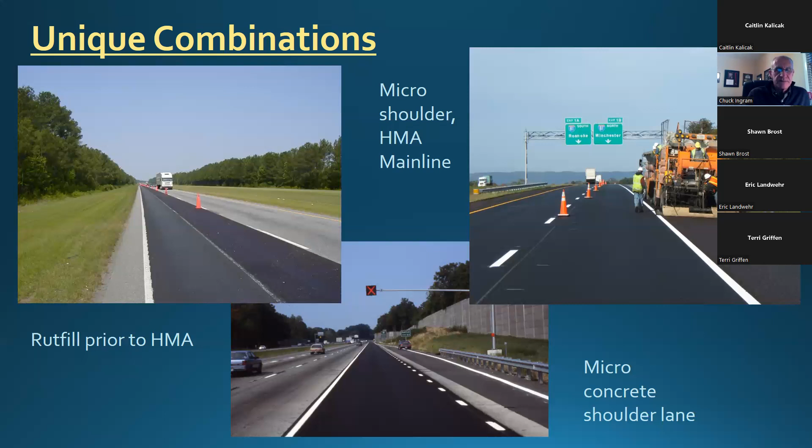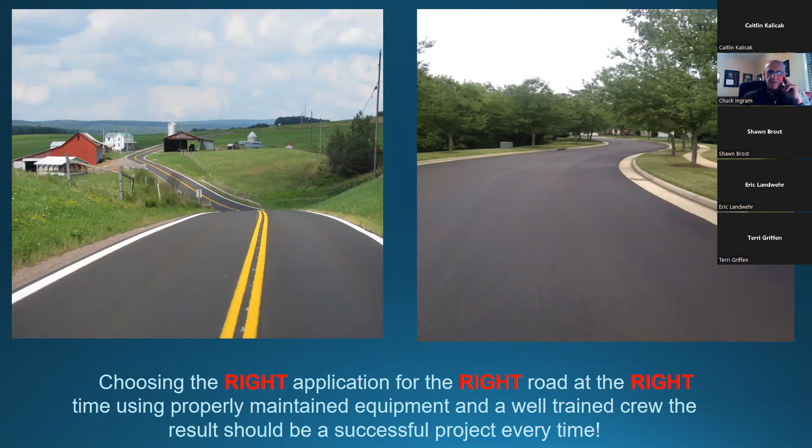But there's just so many options, so many capabilities and possibilities to use these treatments. Deal with your contractor, come up with the right application on the right road, use the right equipment with a well-trained crew, and you should come up with a successful solution to just about any of your problems. Not to say that we want to microsurface the world. We're not going to fix every ill that's out there, but there's plenty of combination treatments. There's plenty of options for preservation that aren't being explored.

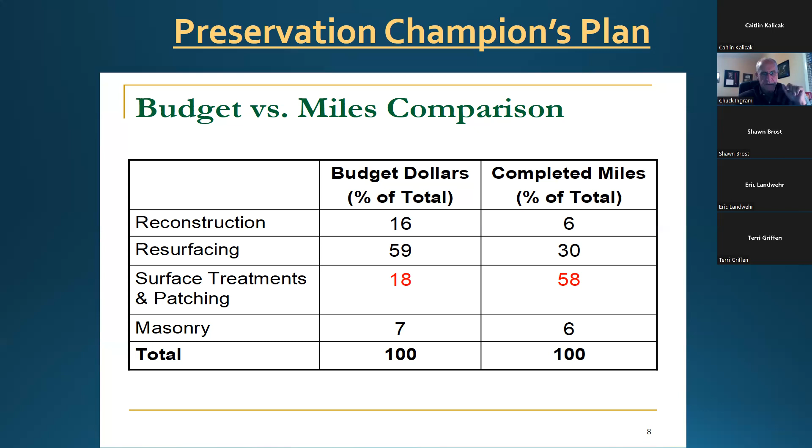We want to get away from that worst-first thinking. Okay, pavement preservation is going to save roads and reduce your costs over time. It will help you by integrating pavement preservation thinking into your whole scheme. It's going to help you with your future budget planning. It's going to teach you how to timely and correctly use these treatments.

But what I do preach to a lot of folks just trying to make this leap into preservation is: don't do it as a one-time shot. You'll look at something a year or two later and say, hey, that stuff worked pretty good. To get a really dramatic picture of it, dedicate, say, a 5-year plan to this. It sounds like a big pill to swallow, but I've done it many times. If you dedicate a sustainable and dedicated funding stream for up to 5 years into your program, dedicate 15, 20% of those dollars to preservation.

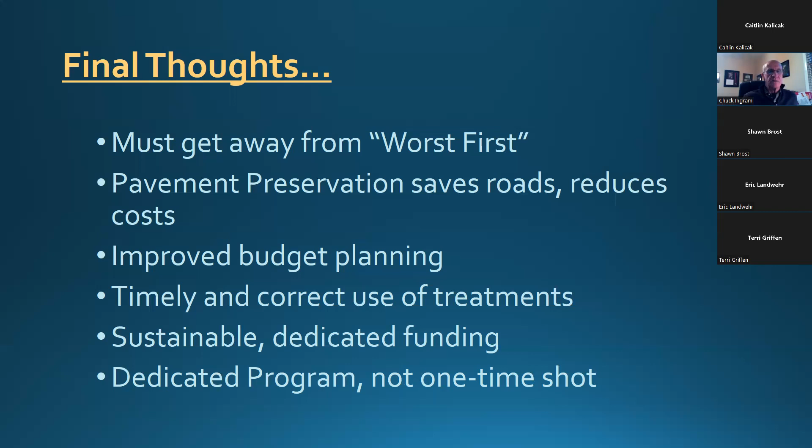At the end of that 5 years, go back with your contractor and share with him the fact that you have bought back your backlog of maintenance. You've improved your pavement condition indexes, and you're staying on budget while you're doing it. So a one-time shot's not going to tell the whole story. Once you make your mind up and bite the bullet to go this direction, just do it. Do it and take a look at it 5 years later. You'd be really surprised. And some other sources of information, who says so besides us.

And certainly the ISSA that Shawn and I are both members of, their website, www.slurry.org. You've got access to all sorts of product information and guideline specifications for those of you that want to get a program started. And we've got a thing going now, trying to get that word out: by board action, we have taken votes to allow all agencies, municipal, state, local agencies, to join the International Slurry Surfacing Association at no cost. You'll have access to all the same information that Shawn and I do on a regular basis, as well as getting feedback from industry. So that's a valuable thing.